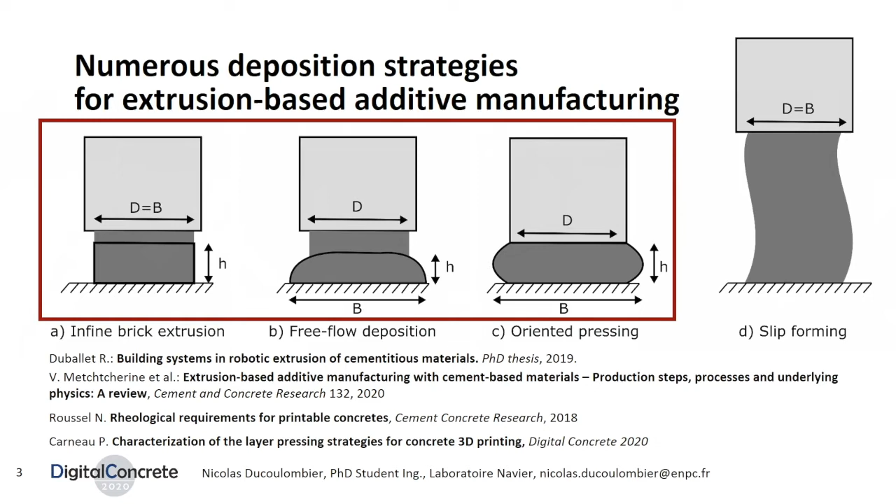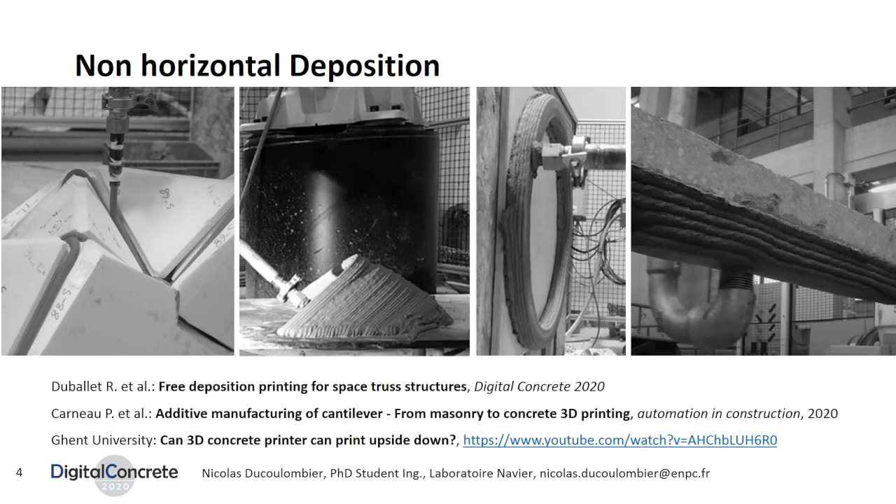One could eventually think of a pressure measurement, but it will rather give information on tribological properties rather than yield stress. Others propose to perform ultrasonic pulse velocity tests to evaluate the elastic properties at the nozzle, but it only provides qualitative information unless proper calibration procedures are made for each printable mixture. We therefore suggest in this presentation another universal method to assess the yield stress at the nozzle exit.

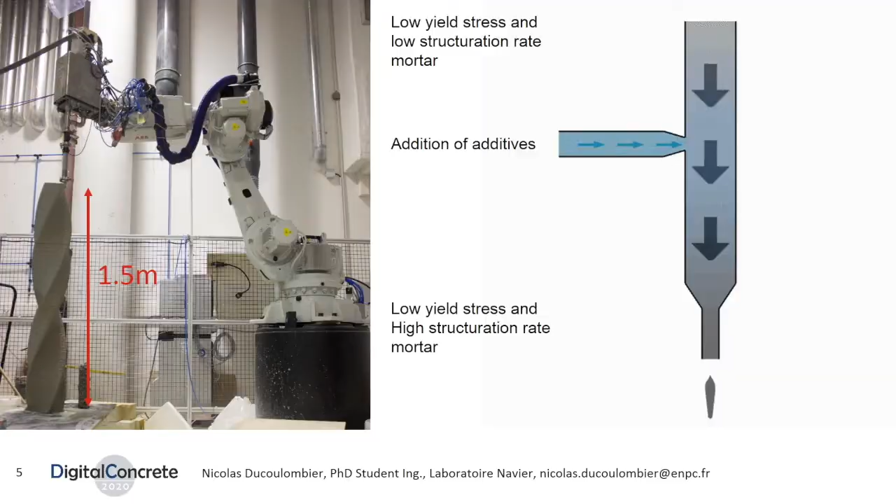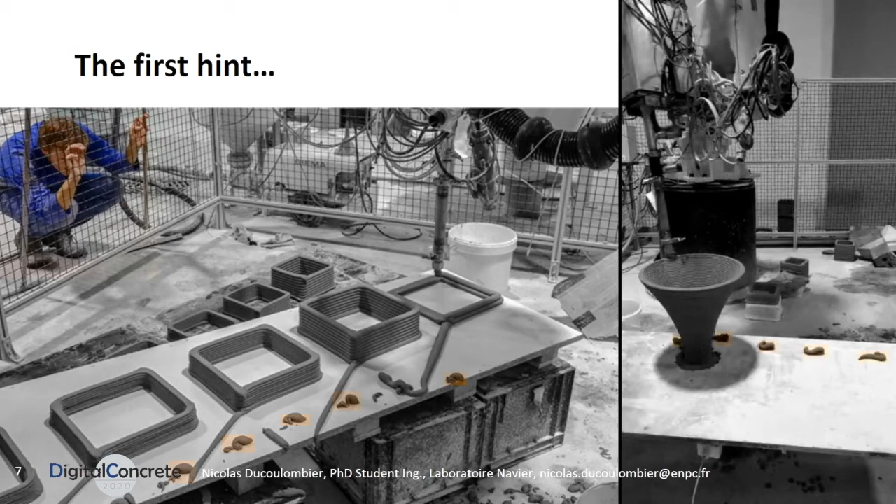The initial idea came from the fact that each time we had a successful printing, we noticed the presence of small slugs around the printing area. They were generated before the printing, during the approach, when the nozzle was still far above the ground. It is the idea of the slug test, and the first empirical assumption: slug formation at the nozzle correlates with successful fabrication. We therefore decided to study in depth the formation of these slugs and its underlying physics.

They are in fact generated by a discontinuous flow that occurs at the nozzle exit shown on the video. First experiments showed that higher accelerator content introduced in the printing head during the extrusion goes with longer slugs. The question is then to settle if the slug mass change actually comes from the modification of the yield stress at the nozzle level.

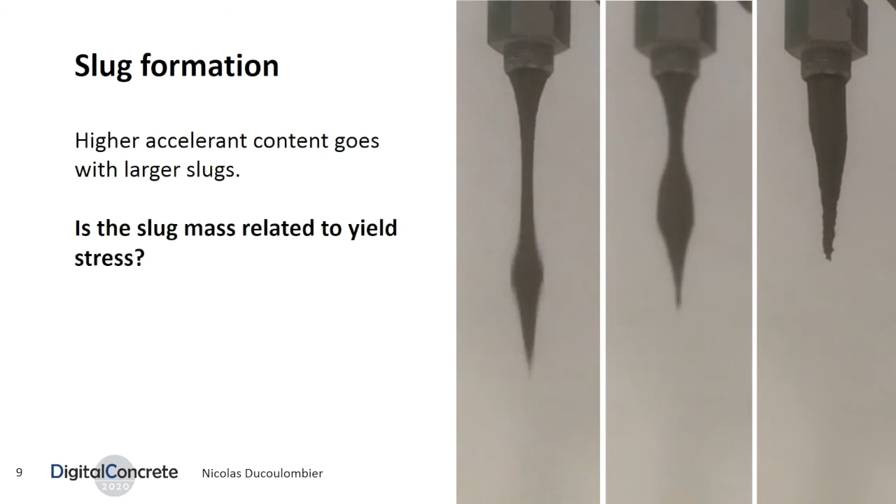The answer is yes for food industry yield stress fluids such as ketchup or mayonnaise. Indeed, the same discontinuous flow was previously identified in this context and studied by Coussot and Gaulard, who provide a theoretical frame for Herschel-Bulkley viscoplastic fluids. It was shown that the slug mass is mainly controlled by yield stress and eventually by viscosity for high values of extrusion speed V, whilst surface tension effects can be neglected. From this analysis, we then compute the straightforward solution for a pure plastic von Mises material with a yield stress tau c.

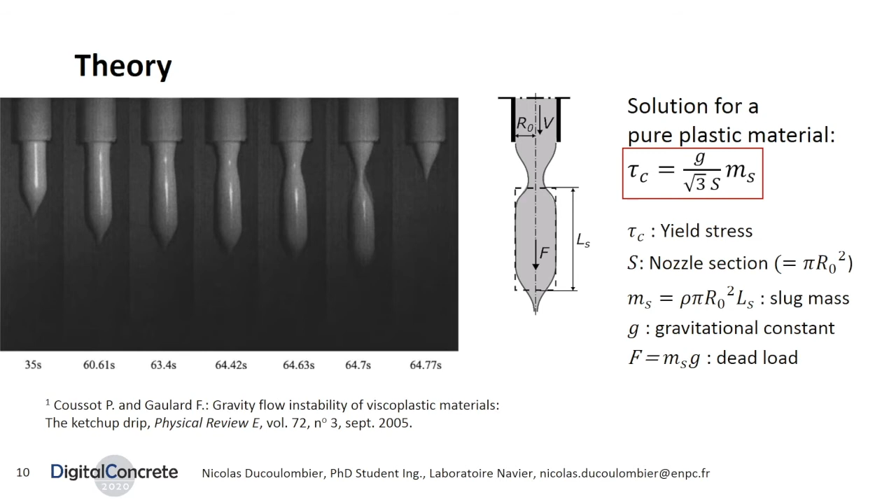This equality is the fundamental relation of the slug test, where the right-hand term is simply the expression of the direct traction von Mises stress at the nozzle exit under self-weight, which only depends on gravitational constant g and the nozzle cross-section S. The experimental validation is then conducted on non-thixotropic material.

As a consequence, the yield stress measured by the slug test can be compared with the yield stress given by the traditional slump test. For some experiments, the slump test is performed using a 280 cubic centimeters cone filled with the material just after mixing, approximately 10 minutes before the slug test, and the estimation is made using the asymptotic solution provided by Roussel and Coussot.

For other experiments, the standard 6-liter Abrams cone is placed under the printing head and filled with the extruded material. Slump yield stress is then estimated using the numerical solution also provided by Roussel and Coussot.

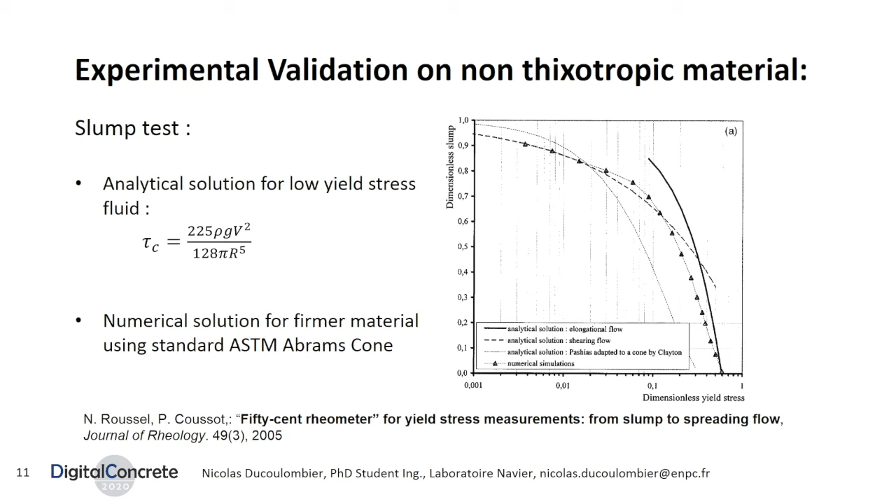The mortar used for validation and also for additive fabrication in building facilities is formulated using a premix provided by LafargeHolcim. However, to strongly reduce thixotropic behavior, no accelerator is introduced in the mixture. Then, the different yield stress values are rather obtained by modifying water and superplasticizer contents, or by replacing the accelerator by a flocculant additive, the polyacrylamide.

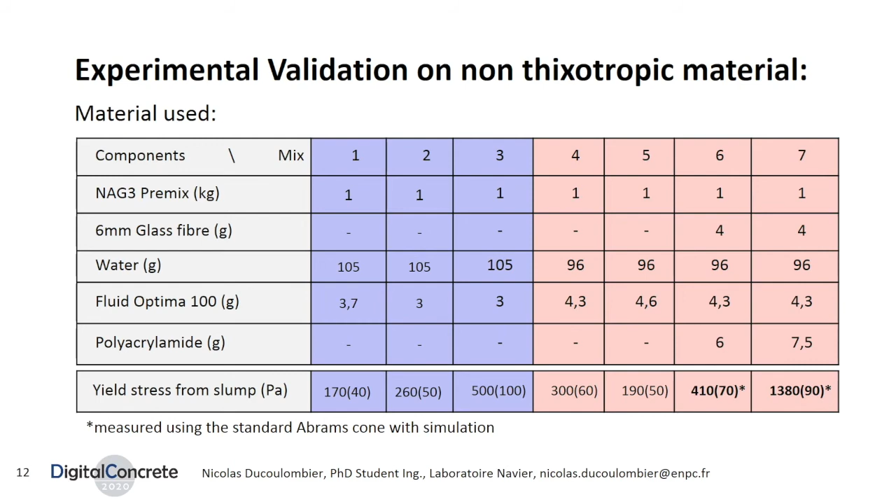The blue experiments were conducted using the specific extrusion device and a simple manual protocol, while the red ones were conducted using an automatic protocol installed in the building facilities. Let us now present both protocols.

The first one is a manual protocol that only requires, in addition to the extrusion device, a simple balance and a container. For the first part of the experimental validation, the specific extrusion device, shown on the right picture, is equipped with a 10 mm diameter nozzle and used together with the manual protocol presented here. Using the fundamental relation of the slug test, the yield stress assessment can be easily performed by the collection of a given number of slugs, followed by a simple mass measurement.

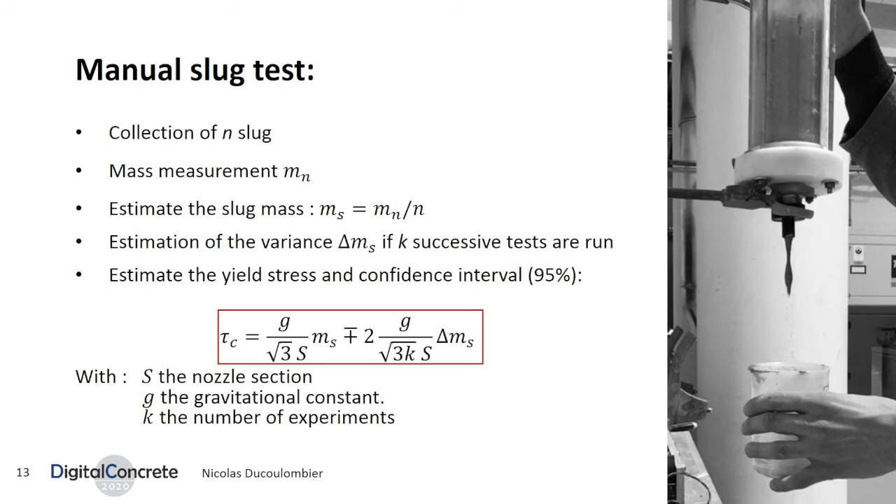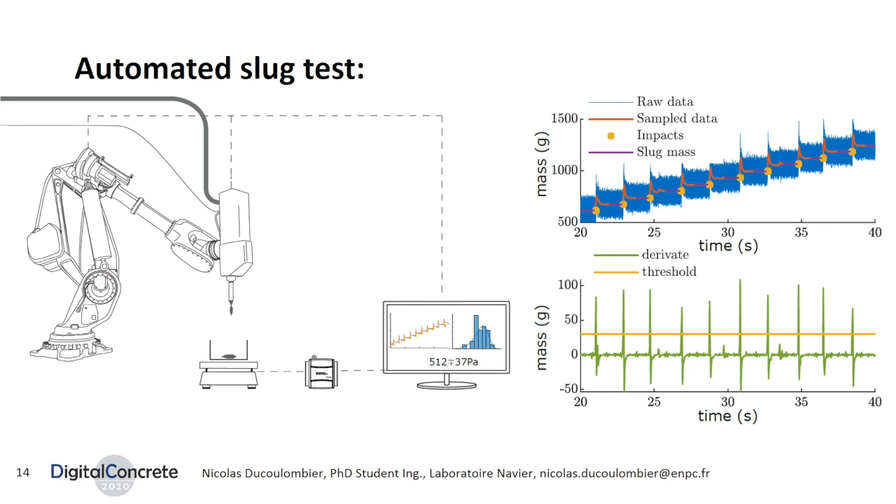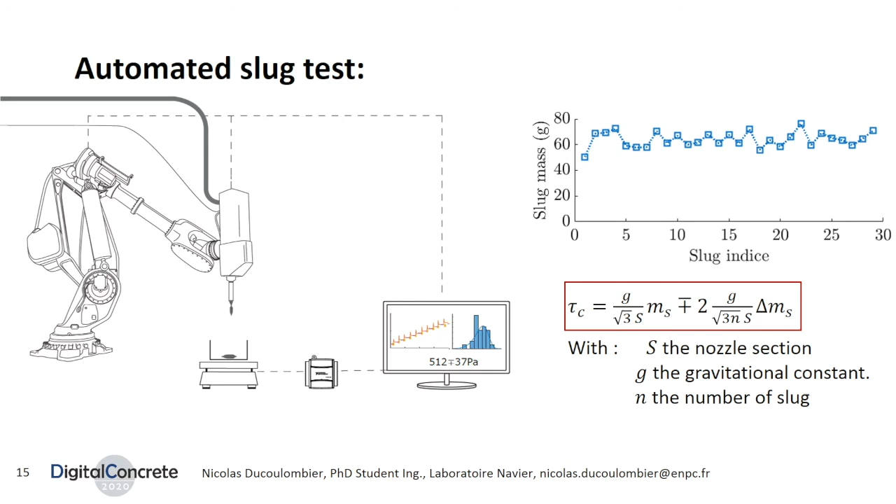The difference between each step gives the mass of each individual slug that is plotted on the following graph. Both yield stress, mean value, and confidence interval can then be automatically calculated using the same expression as the one obtained for the manual slug tests, taking the number of experiments k equal to the number of slugs n. This automated slug test using our printing head equipped with a 20 mm diameter nozzle was used for the second part of the experimental validation. The number of slugs n is around 30 for both manual and automatic slug tests.

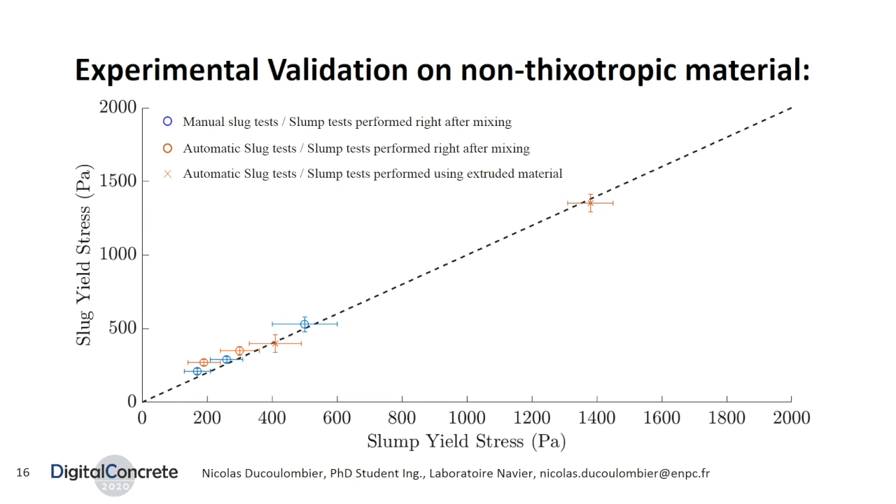To conclude, we introduce a simple test for direct inline assessment of yield stress at the nozzle level for extrusion-based additive manufacturing. Two different protocols are proposed. The first one is manual and only requires a container and a balance. The second one is an automatic procedure permitting to automatically estimate the yield stress and the confidence interval.

The automatic slug test is currently performed just before each fabrication in building facilities to adjust the printing parameters with the actual yield stress and the flow rate measurements. Finally, a direct transfer to industry is possible. In fact, a similar system is currently being installed in XtreeE facilities.

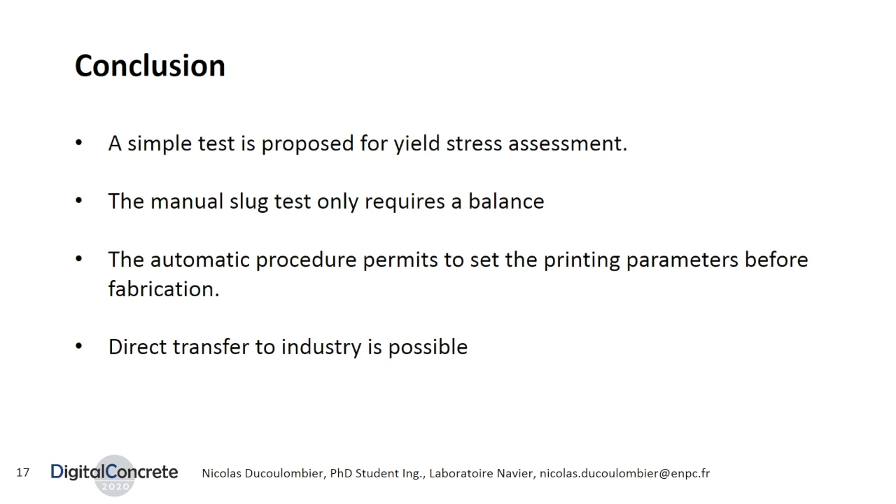The main perspective of this work is the statistical information provided by the automatic slug test. When plotting the probability density of the slug mass and fitting a normal distribution to mixes 6 and 7 of the present study, significant differences concerning the standard deviation, variance, and variation coefficients can be noted between the two mixtures. To our mind, this coefficient of variation should give further information on the homogeneity of the material at the nozzle exit, which is particularly interesting when inline addition of additives such as accelerator, reinforcement, or aggregate is made during the printing. Upcoming work will tackle this issue.